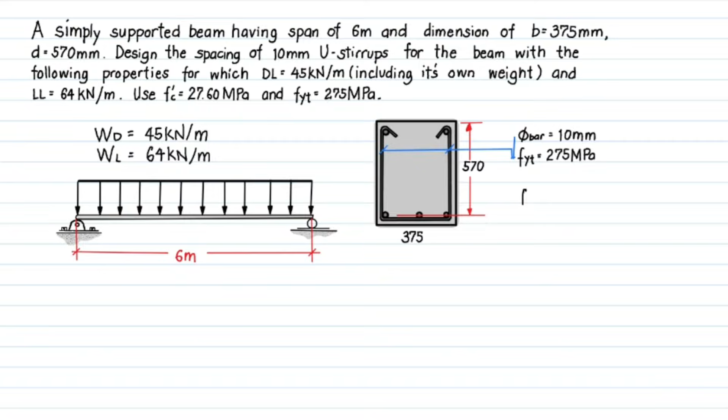Our problem is a simply supported beam having a span of 6 meters, with base B equal to 375 millimeters and effective depth D of 570 millimeters. We denote WD, the dead weight, as 45 kilonewton per meter, and WL, the live weight, as 64 kilonewton per meter. Use F'C equal to 27.60 megapascal, the concrete compressive strength of the beam, and Fyt equal to 275 megapascal, the yield strength of the stirrups or web reinforcement.

Let's convert the given loads into their equivalent factored load. Since dead load and live load are the only given loads, the available load combination we will use is 1.2 dead load plus 1.6 live load.

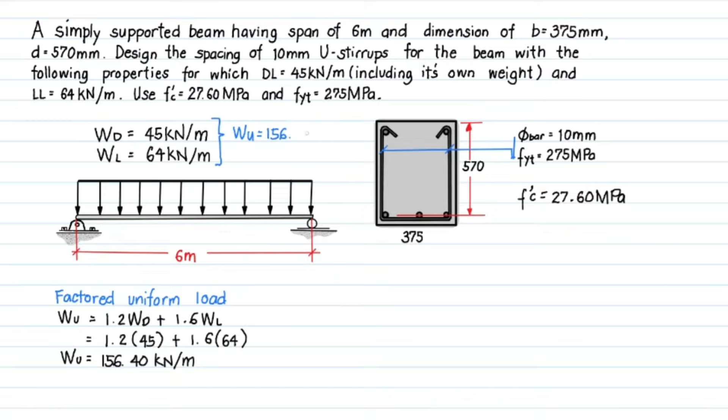The factored load WU is equal to 1.2 W dead plus 1.6 W live. The given dead weight is 45 kilonewton per meter, and the given live weight is 64 kilonewton per meter. The value of the factored uniformly distributed load is equal to 156.40 kilonewton per meter. This equivalent factored load, WU, is what we will use going forward: 156.40 kilonewton per meter.

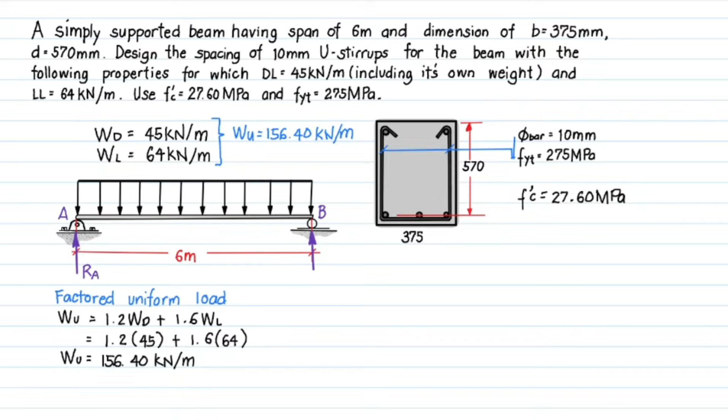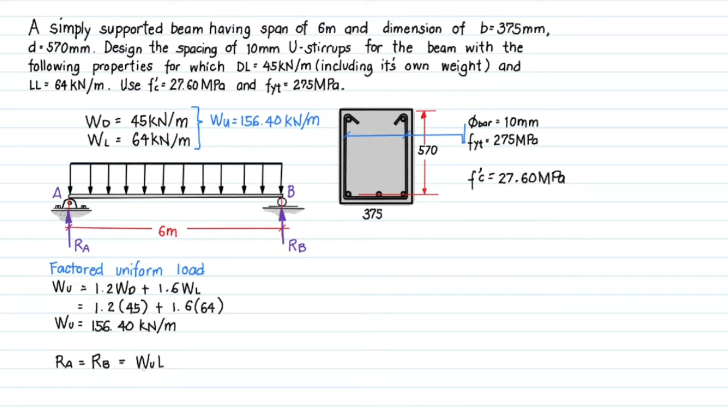We denote one end of the beam as point A and the other as point B. RA is the reaction at point A and RB is the reaction at point B. Due to the symmetry and loading of the beam, RA is equal to RB, so they share the total downward force on the beam equally. This value is equal to WU multiplied by the length of the beam over 2. Let's replace RA and RB with RU: WU equal to 156.40 kilonewton per meter multiplied by the length of the beam, 6 meters, over 2. The value of RU is equal to 469.20 kilonewton.

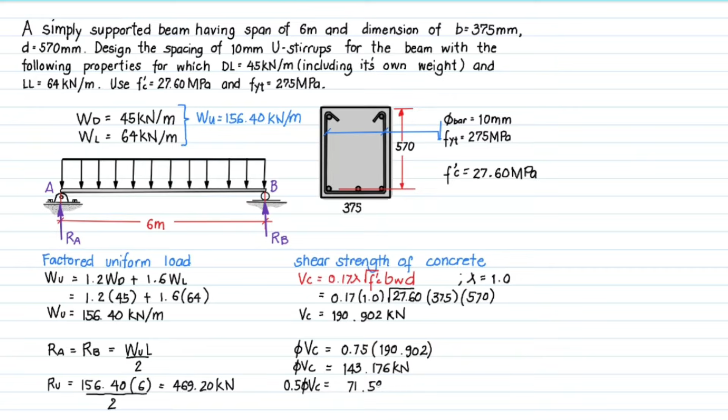Let's also compute other values we will need later, such as the reduction factor times VC. The reduction factor for shear is 0.75, and VC is 190.902 kilonewton, giving a value of reduction factor times VC equal to 143.176 kilonewton. Another value we will need later is 0.50 times the reduction factor times VC. Dividing the reduction factor times VC value by 2 gives us 71.588 kilonewton.

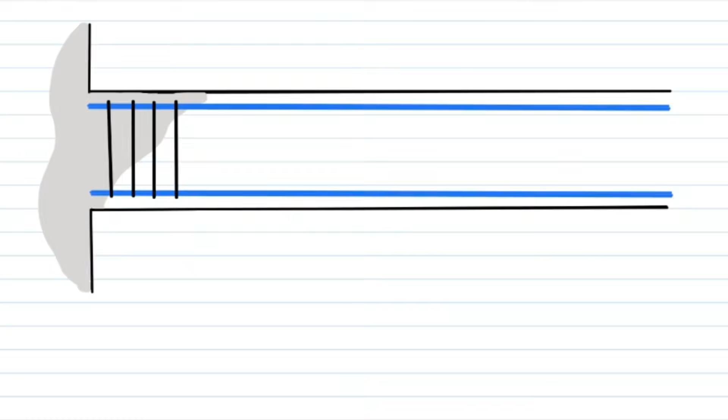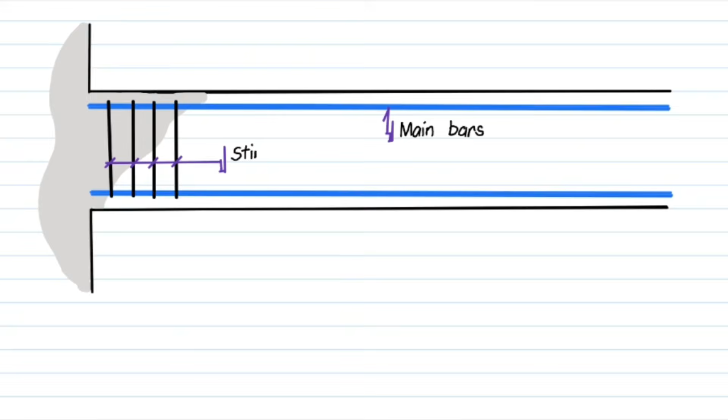Let's show the sectional view of the beam. The color blue represents the main bars, this represents the stirrups, and this represents the face of the column or face of the support.

Based on NSCP 2015, Section 409.4.3.2, sections between the face of the support and a critical section located at distance D from the face of the support. The critical section of the beam, based on shearing, is located at distance D from the face of the support. This is the critical section of the beam.

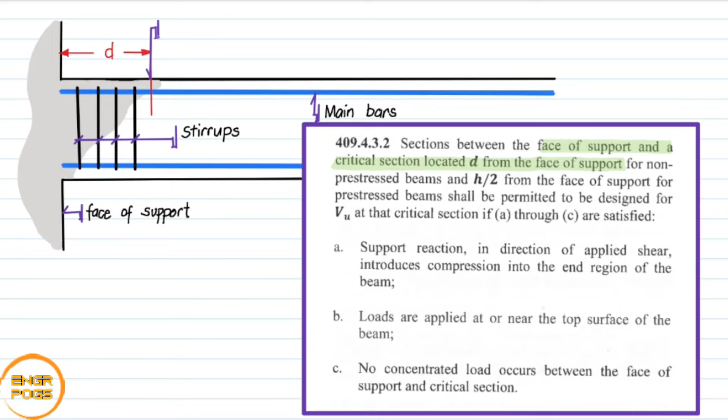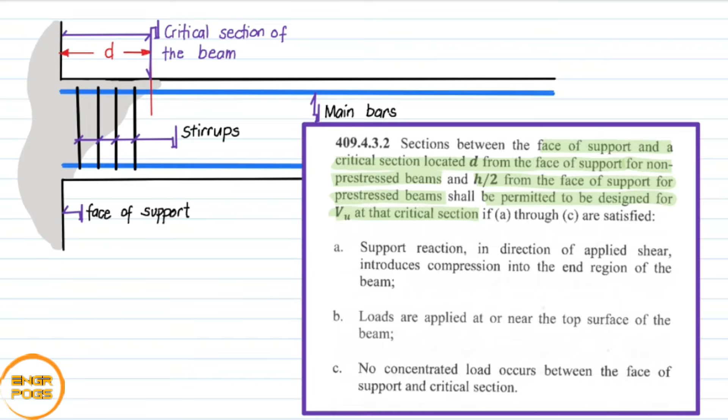We forgot to mention earlier that this is for non-prestressed beams, since the location of the critical section is different for prestressed beams, which is located at a distance of h/2 from the face of the support. It shall be permitted to design for Vu at the critical section. This means that from the face of the support up to the distance of the critical section, or distance D, we can design this zone based on the value of Vu at the critical section.

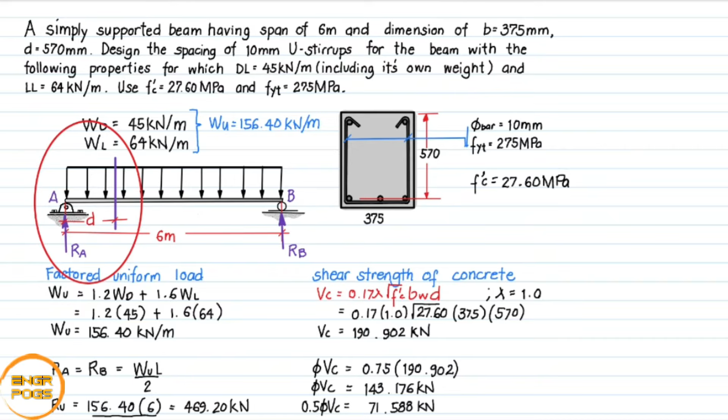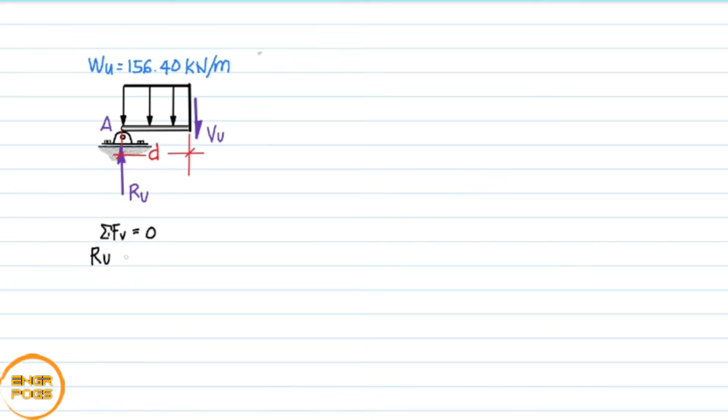Let's cut the beam at distance D from the support, and take the left cut segment of the beam. Of course, once we cut the beam, its internal shear appears. We denote this as Vu. To get the value of Vu, we use the equation of static equilibrium: summation of forces vertical equal to 0. Let's assume all upward forces are positive: Ru minus Vu minus the equivalent concentrated force of the uniformly distributed load, which is equal to WU multiplied by its length, which is equal to D, the effective depth of the beam.

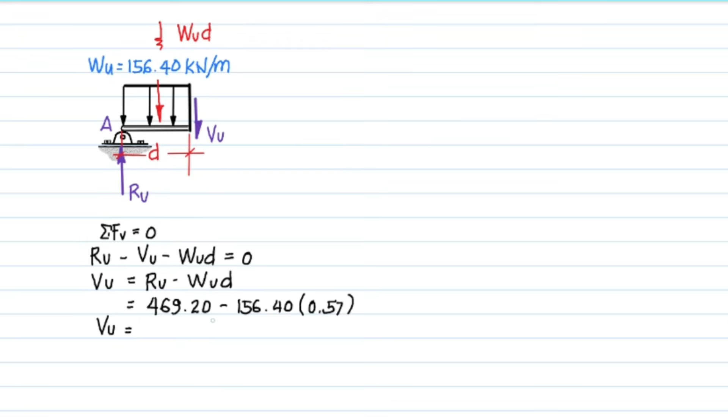This is equal to 0. Arranging our equation, Vu is now equal to Ru minus Wud. We already got the value of RU earlier, 469.20 kilonewton, minus WU, 156.40 kilonewton per meter. The length of this uniformly distributed load in our figure is equal to D, and the value of D is 570 mm, which we need to convert into meters to keep our units uniform, giving 0.57 meters. The value of Vu is now equal to 380.052 kilonewton.

This value of Vu that we got is the factored shear at the critical section, or at distance D from the face of the support.

Let's get the value of the nominal shear strength of the beam. Vn is equal to Vu over reduction factor. Vu is equal to 380.052 kilonewton, over the reduction factor for shear, which is 0.75. The value of the nominal shear strength of the beam, or Vn, is equal to 506.736 kilonewton.

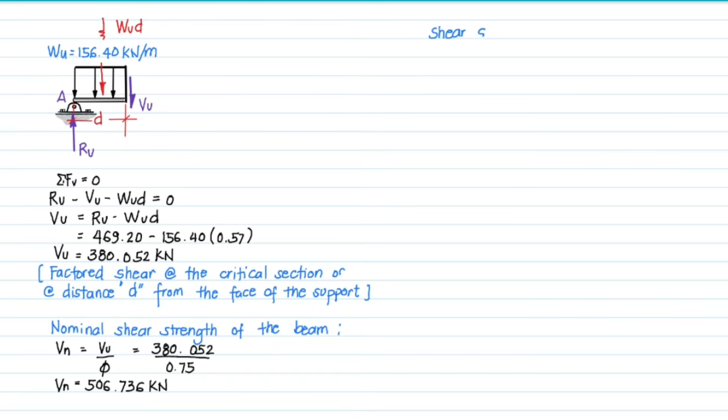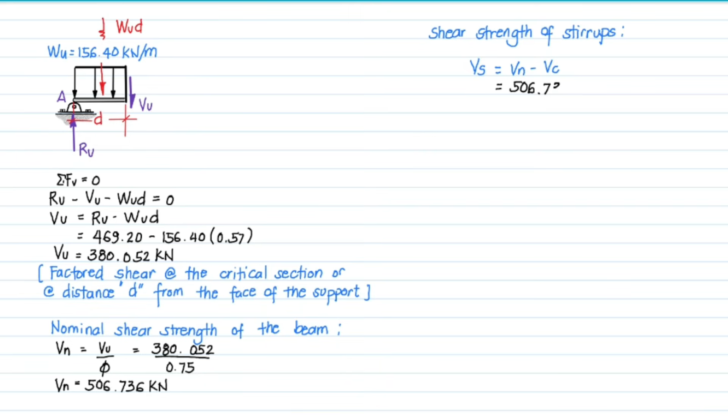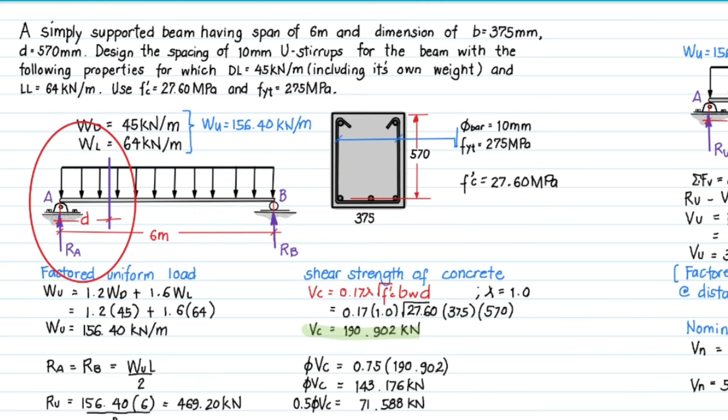After that, let's get the shear strength of the stirrup. To solve for the value of Vs, the shear strength of stirrups, it's simply equal to Vn minus Vc. Vn is the nominal shear strength of the beam, 506.736 kilonewton, minus Vc, the shear strength of the concrete, which we got earlier as 190.902 kilonewton. The value of Vs is equal to 315.834 kilonewton.

After this, we need to verify if the section is adequate to carry the required shear, using the formula Vs max equal to 0.67 square root of f'c bw d. 0.67 square root of F prime C, 27.60, BW is 375 millimeters, and effective depth D is 570 millimeters. The value of Vs max is equal to 752.377 kilonewton.

Since the required value of Vs, 315.834 kilonewton, is less than the value of Vs max, 752.377 kilonewton, therefore we can state that the section is adequate to carry the required shear.